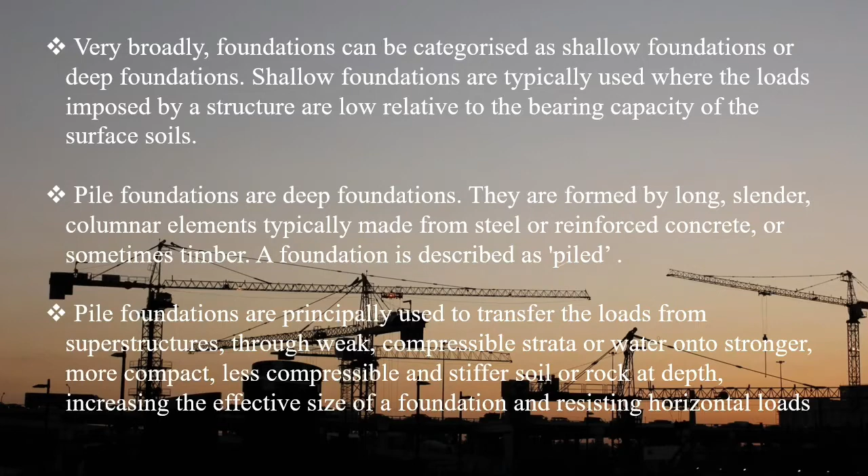Introduction of piling. So, I continue the presentation with types of pile foundation. Pile foundation is divided into two, by functioning and by installing. For functioning, there are two types: end-bearing pile and friction pile. While for installing, there are two types, which are driven piles and bored piles.

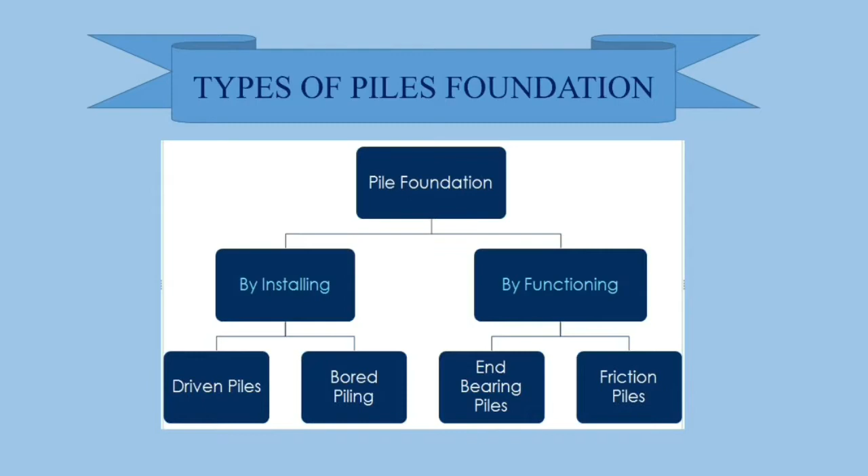So next, pile foundation classification by installing. First, displacement piles or driven piles. Driven piles, also known as displacement piles, are commonly used for a building foundation that provides support for structures, transferring their load to layers of soil or rock that have sufficient bearing capacity and suitable settlement characteristics.

A driven pile is a long, slender column made of preformed material and having a predetermined shape and size that can be installed by impact hammering, vibrating or pushing it into the ground to a designed depth or resistance. If the soil is particularly dense, pre-drilling may be required to enable the pile to reach the designed depth.

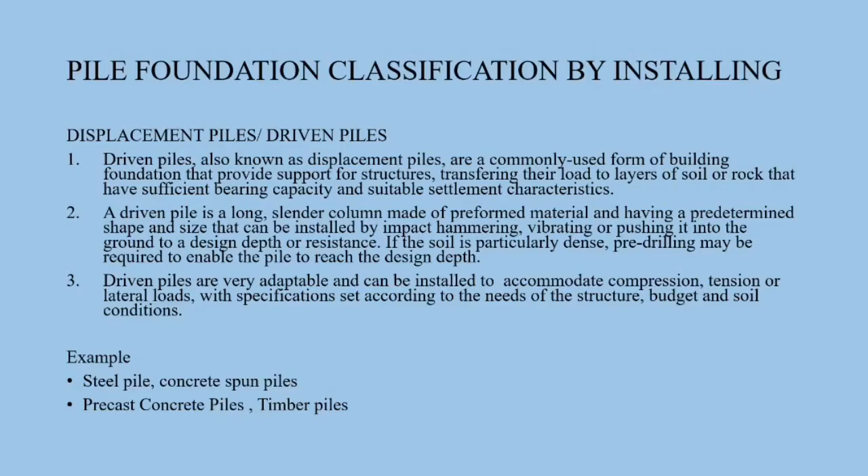Okay, next, types of driven piles. Types of driven piles are divided into four: steel, precast concrete, timber and composite. First, steel. Standard steel sheet pile sections can be used to form box section piles or H section piles. Second, precast concrete. This can be square, octagonal, cylindrical or sheet pile.

Third, timber. These are usually square sawn but can also be circular, tapered, treated, untreated and percussion driven. Last, composite. These are piles that use a combination, such as a concrete pile with a steel tip extension.

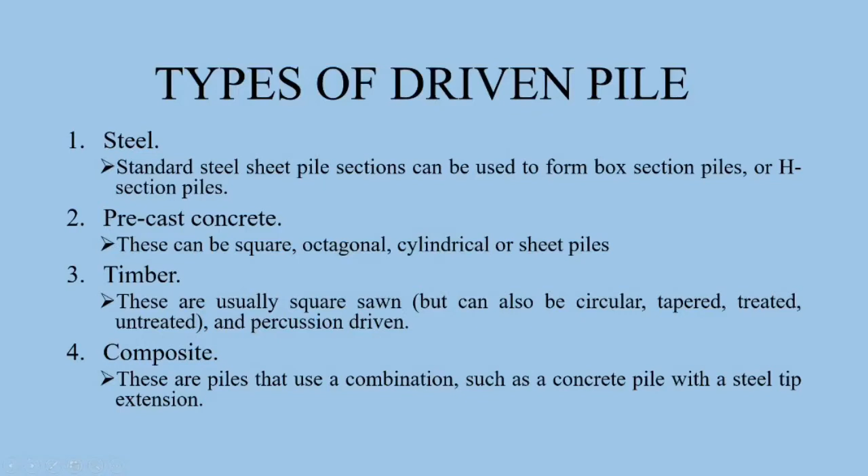Okay, the second pile foundation by installing is replacement piles or bored piles. Bored piles, also known as replacement piles, are commonly used for a building foundation that provides support for structures, transferring their load to layers of soil or rock that have sufficient bearing capacity and suitable settlement characteristics.

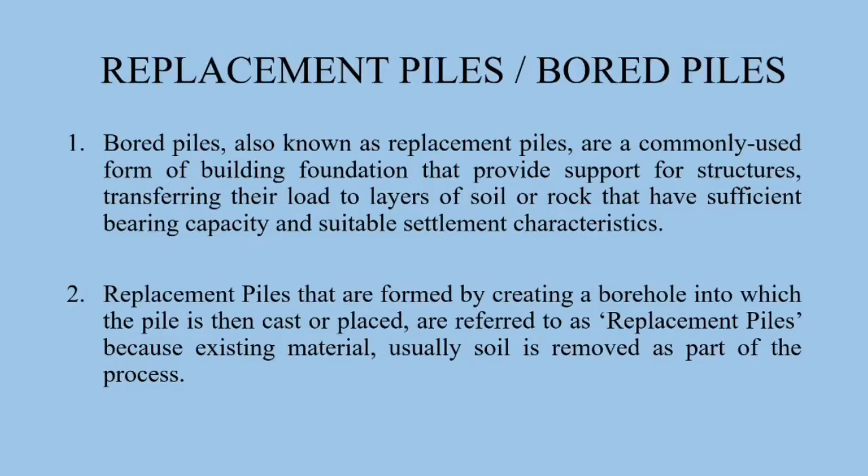Okay, next, pile foundation classification by functioning. Pile foundation classification by functioning is divided into two: end-bearing piles and friction piles. An end-bearing pile transfers its load onto a firm stratum like rock. Where soil bearing capacity is low, end-bearing piles are installed. Prefabricated piles and auger type piles can be used.

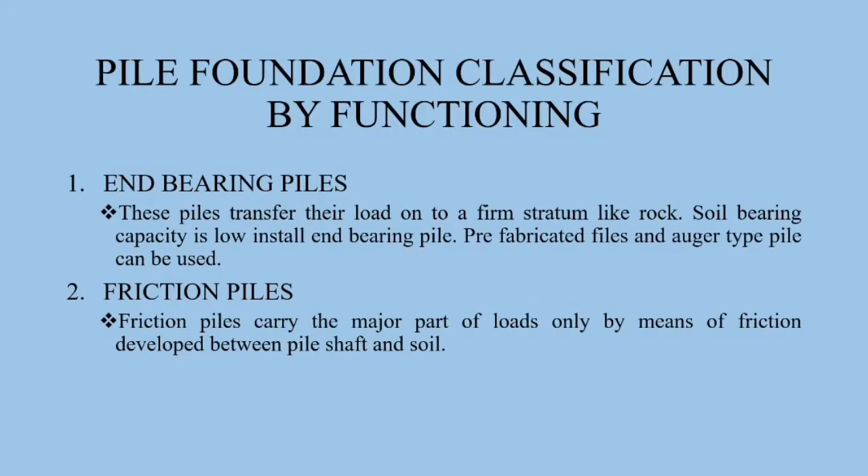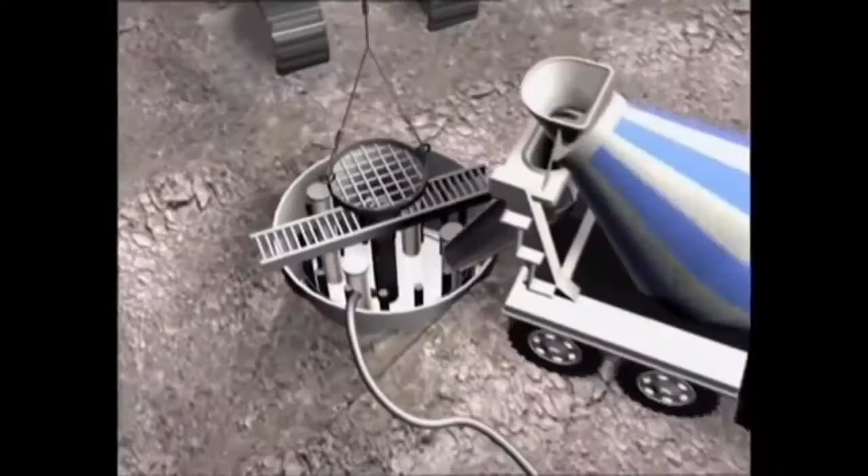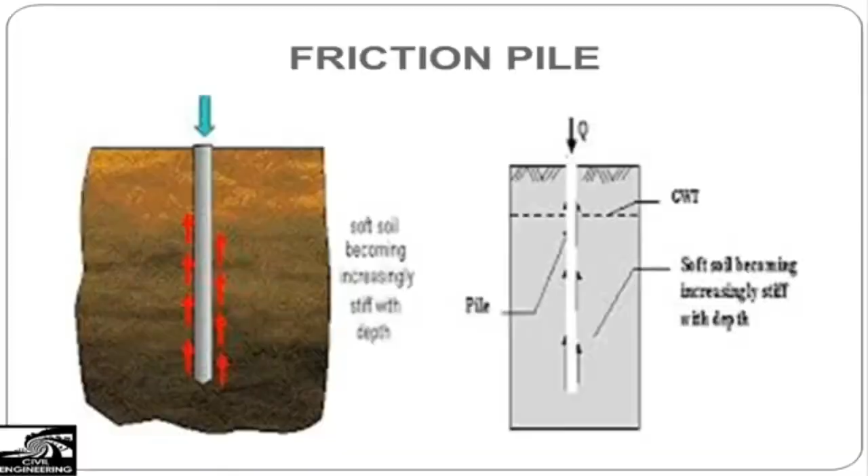For this part, I will explain about individual pile capacity. What is capacity of pile? Capacity of a pile group is the sum of the individual capacity of piles. Piles are driven generally in groups in a regular pattern to support the structural loads. The structural load is applied to the pile cap that distributes the load; capacity of the pile group is the sum of individual capacity of piles.

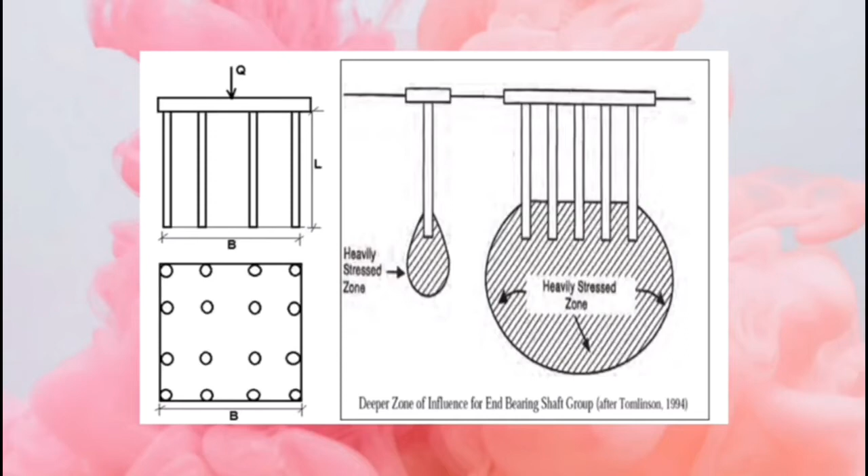The efficiency of a pile group depends on the following factors. First, spacing of piles. Second, total number of piles in a row and number of rows in a group. Third, characteristics of the pile like material, diameter, and length.

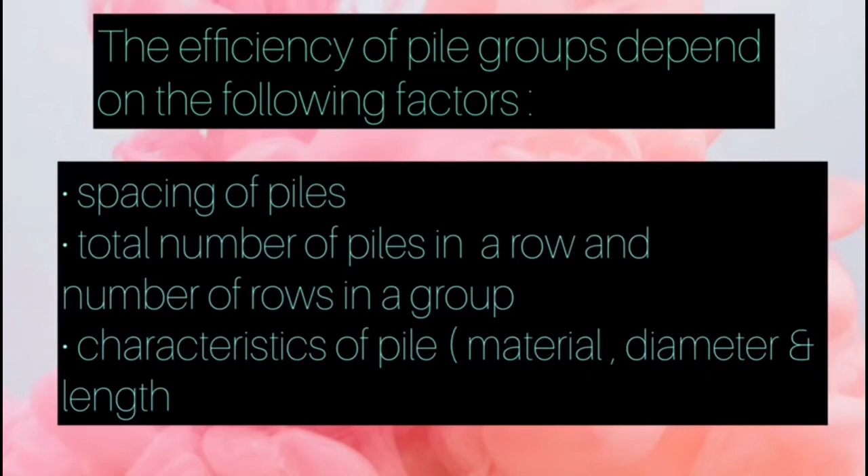The reduction in total bearing value of a group of piles is more in the case of friction piles, particularly in clay soil. No reduction due to grouping occurs in end-bearing piles. For pile groups which resist the load by the combined action of friction and end bearing, only the load carrying capacity of friction is reduced.

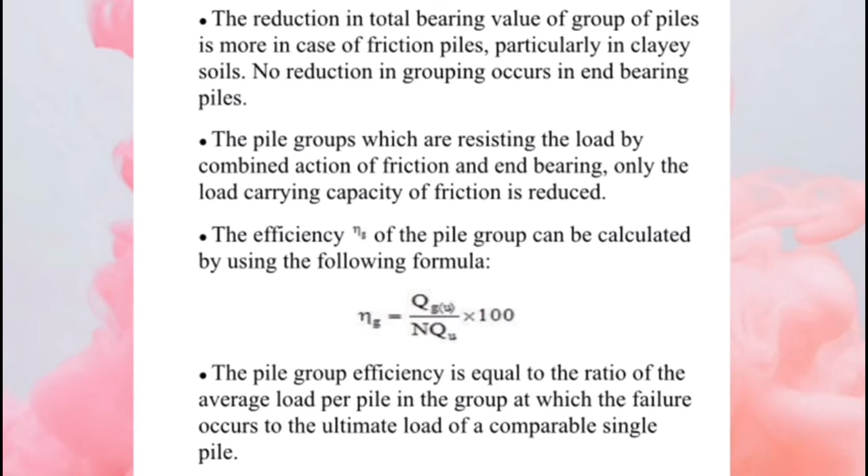The efficiency of the pile group can be calculated by using the following formula. The pile group efficiency is equal to the ratio of the average load per pile in the group at which failure occurs to the load of a comparable single pile. This is an example of the Converse-Labarre formula.

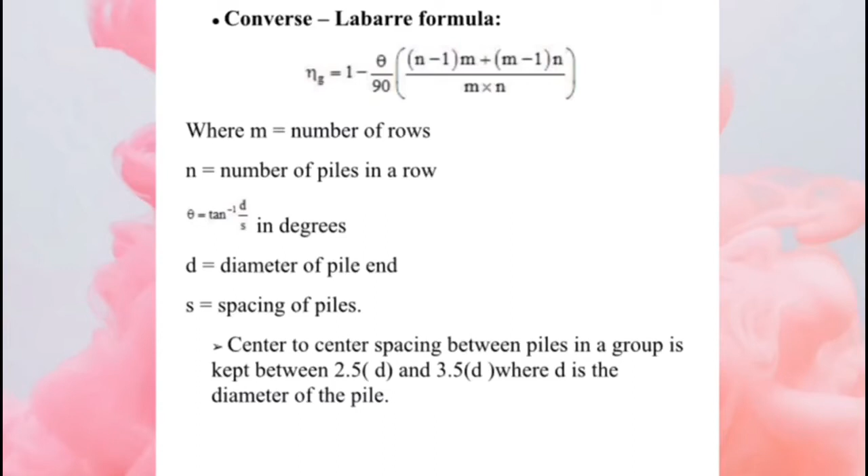M stands for the number of rows, N the number of piles in a row, D the diameter of the pile, and S the spacing of piles. Center to center spacing between piles in a group is kept between 2.5D and 3.5D, where D is the diameter of the pile.

Now we continue the presentation with pile testing. Pile testing is divided into three. First is the dynamic load test. Pile load testing is a direct method for determining the geotechnical capabilities of a pile. Dynamic load testing with the aid of a pile dynamic analyzer (PDA) is a fast, cost-effective, and reliable method for assessing foundation bearing capacity. Dynamic load testing provides information on the distribution of resistance, the axial resistance, and the end bearing.

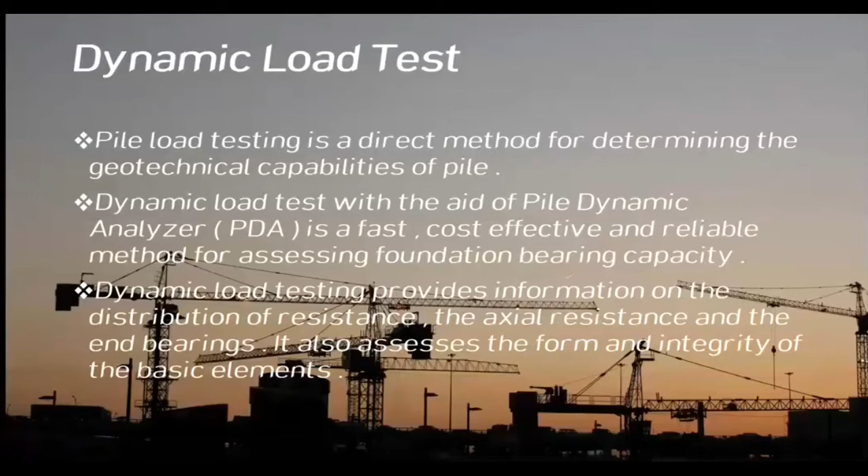It also assesses the form and integrity of the foundation element. The test can help you choose the right type of pile to withstand strain on the pile while driving, check if the pile reaches a specified length, and prevent unnecessarily long piles. It also provides information on structural integrity, driving stresses, and hammer efficiency.

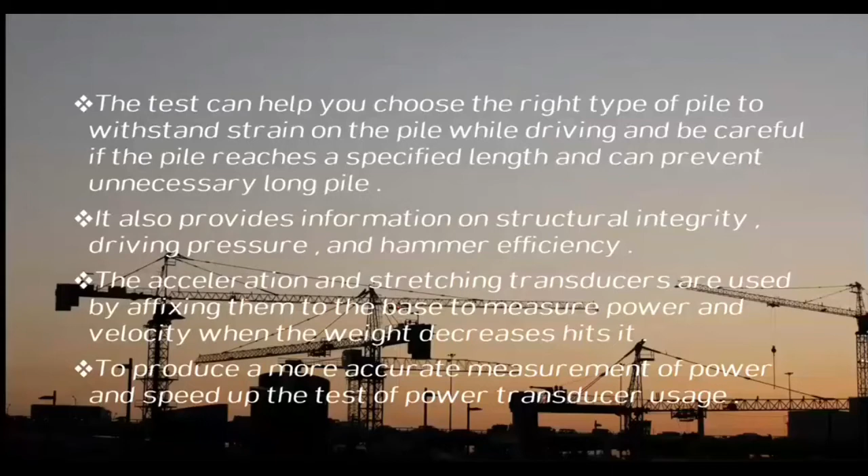The acceleration and strain transducers are affixed to the pile to measure force and velocity when the drop weight hits it. To produce a more accurate measurement of force and velocity, the test uses force transducers. This is the photo of the dynamic load test and PDA.

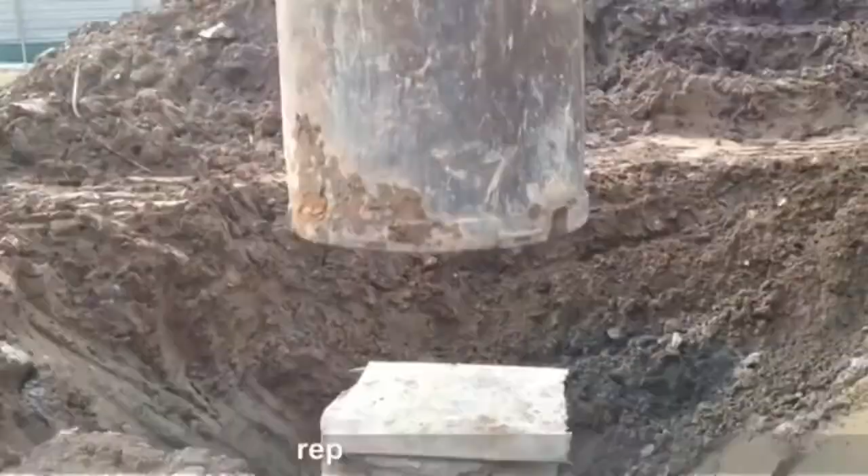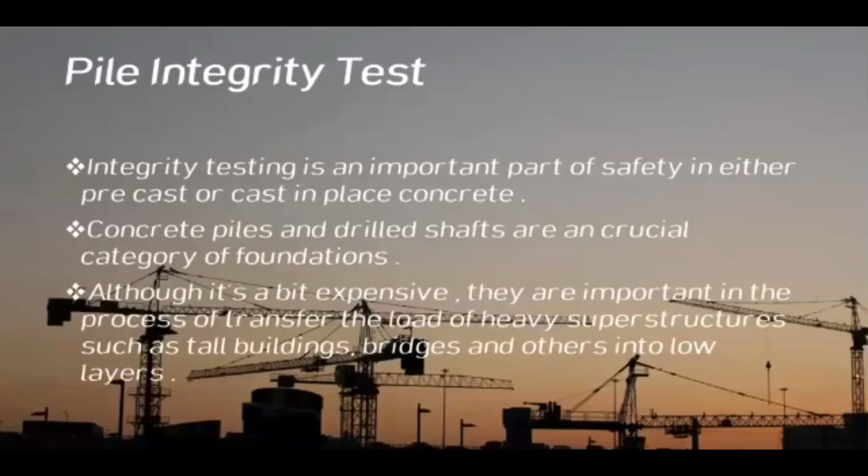Integrity test. Integrity testing is an important part of safety in either precast or cast-in-place concrete. Concrete piles and drilled shafts are crucial categories of foundation. Although they are a bit expensive, they are important in the process to transfer the load of heavy superstructures such as tall buildings, bridges, and others into lower layers.

Characteristics of deep foundations and piles include: first, physical dimensions of the pile, length or cross-section. Second, continuity of the pile, presence of voids or major cracks. Third, consistency of the pile material. Integrity tests for cast-in-place and precast concrete use the ultrasonic method and the low strain method, which provide acceleration and velocity.

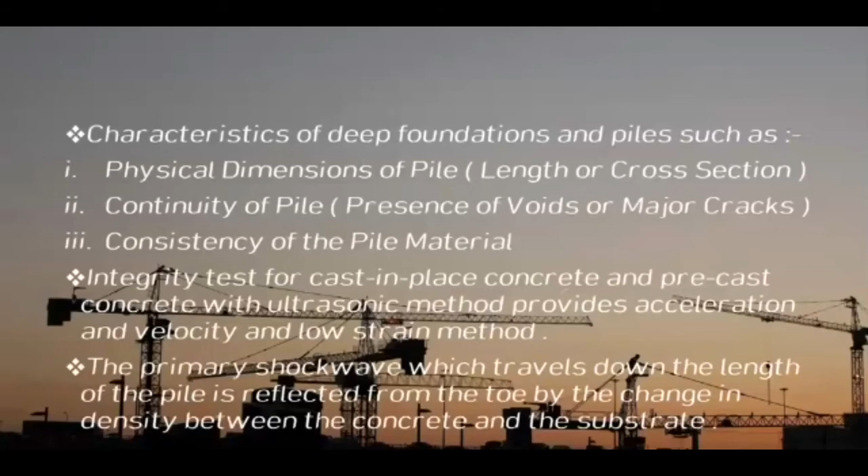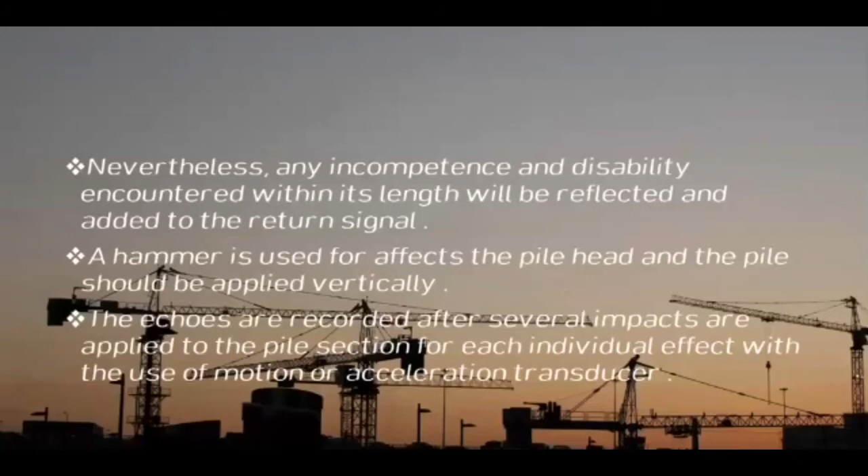The primary shock wave which travels down the length of the pile is reflected from the toe by the change in density between the concrete and the substrate. Nevertheless, any defects encountered within its length will be reflected and added to the recorded signal. A hammer is used to strike the pile head, applied vertically. The echoes are recorded after several impacts are applied to the pile for each individual test with the use of motion or acceleration transducers.

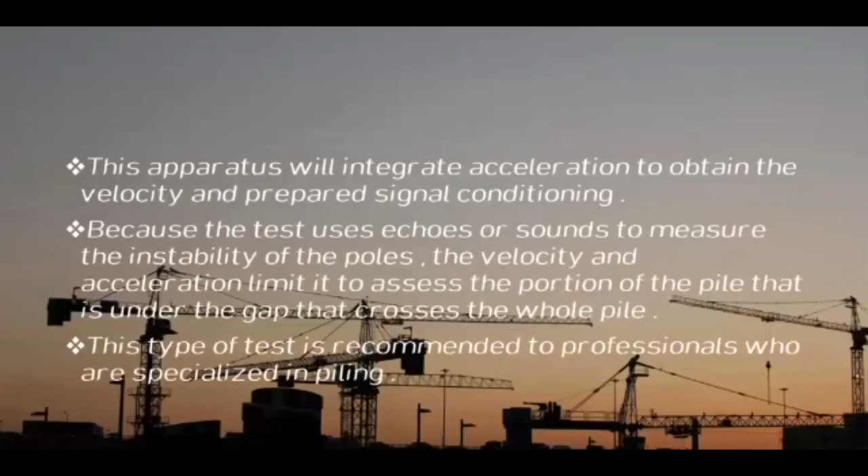This apparatus will integrate acceleration to obtain the velocity and perform signal conditioning. Because the test uses echoes or sound to measure the integrity of the pile, velocity and acceleration limit it in assessing the portion of the pile below a defect that crosses the whole pile. This type of test is recommended for professionals who are specialized in piling. This is the photo of the integrity load test.

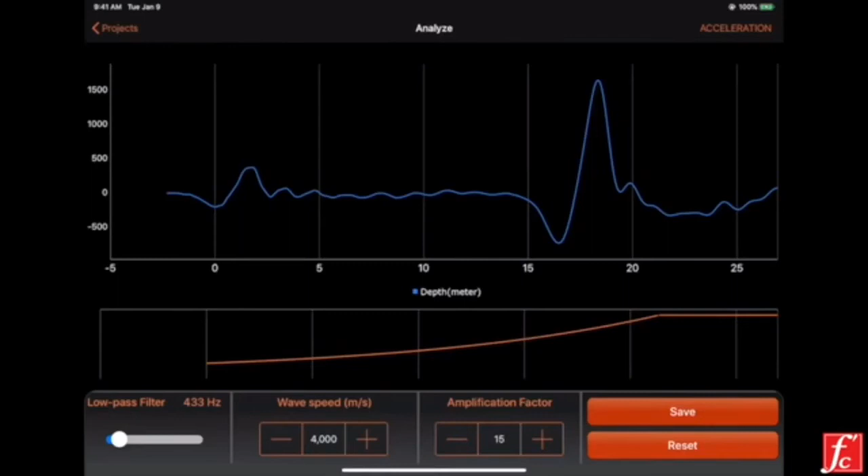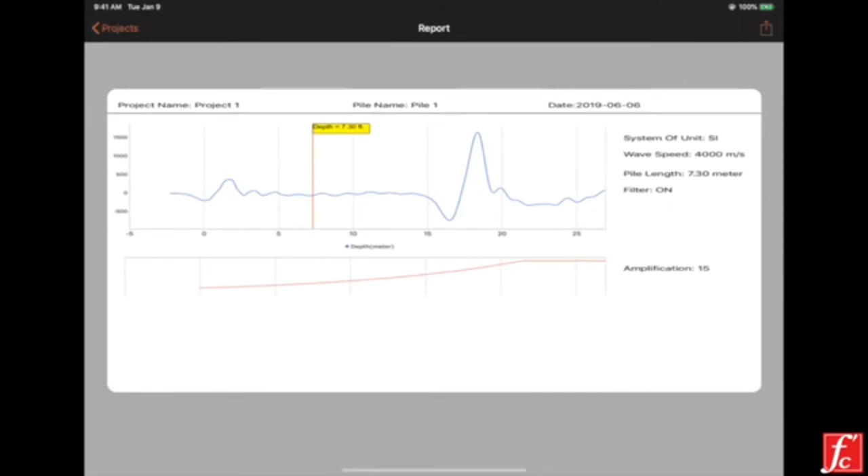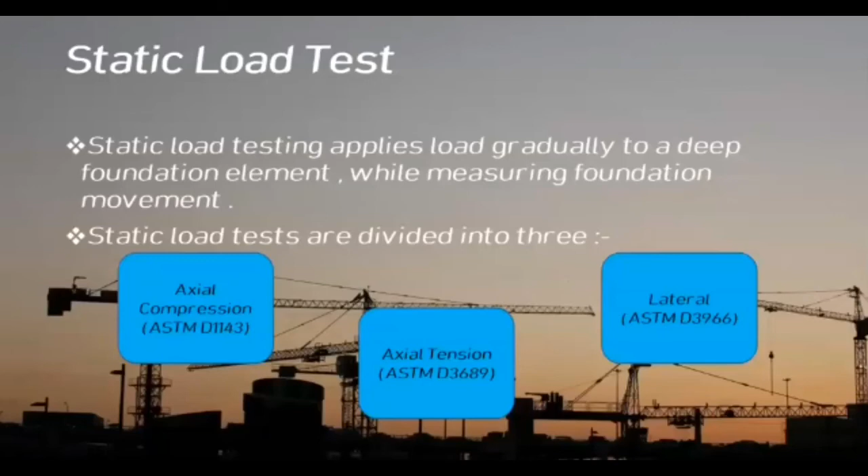Static load test. Static load testing applies load gradually to a deep foundation element while measuring foundation movement. Static load tests are divided into three. First, axial compression. Second, axial tension. Third, lateral. Axial compression: the compression test uses a beam and frame overhead reaction, with the load resisted by a reaction stack or dead weight.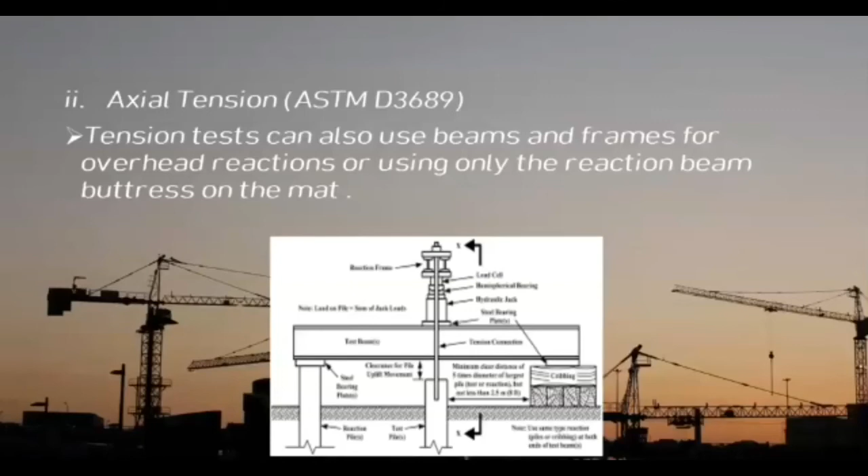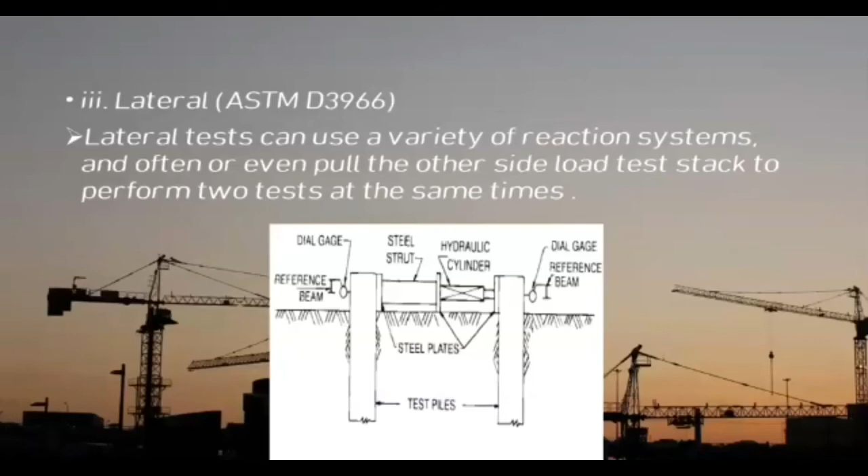Axial tension: the tension test can also use a beam and frame for overhead reaction, or only the reaction beam buttressed on the mat. Lateral: the lateral test can use a variety of reaction systems, and often pushes or pulls against another load test setup to perform two tests at the same time. These tests are usually performed to a maximum load related to the foundation design load or to geotechnical failure.

In the static load test, the test load will be applied with a hydraulic jack against the kentledge concrete blocks, with the load measured with a calibrated pressure gauge and verified at the chosen pile. The pile settlement will be recorded with dial gauges mounted on the reference beam, and to confirm the reading an optical level will be used. It will be tested with load increments following the required standard, with load, time and settlement recorded.

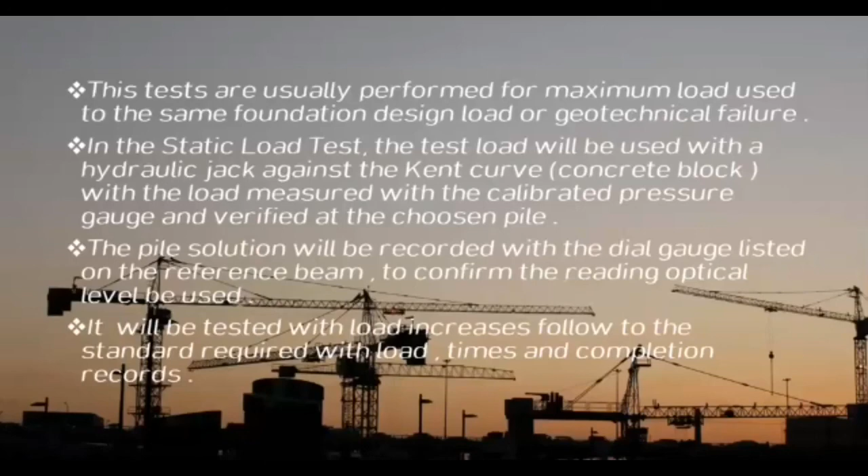The criteria for determining pile load are, but are not limited to, the following. First, the load at which settlement continues to increase without an increase of load. Second, the load beyond which there is an increase in net settlement disproportionate to the increase in load.